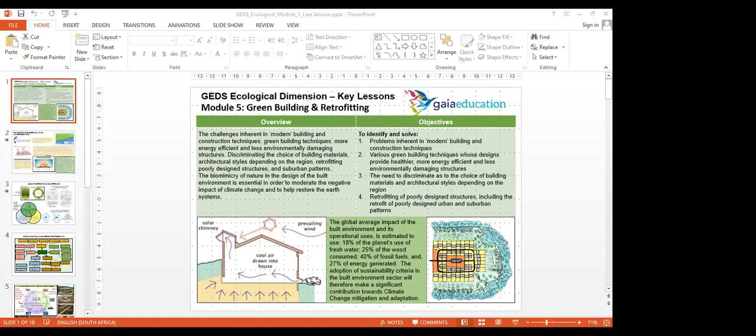Let's get going with the slideshow, and then we can have quite a bit of question and answers towards the end. So in the fifth module, which is green building and retrofitting, it pretty much starts to pull in information from the second module, which is your wastewater treatment and sanitation, urban food systems, renewable energy systems, and it brings it all together in the built environment.

And our built environment is huge. It occupies a big component of the ecological footprint. And we need to apply ourselves with green building technologies, but also retrofitting of the existing built environment stock. So those are some of the key background about this module.

The specific learnings to come out of this would be trying to understand how we can apply whole systems thinking for the built environment, looking at various materials that we can use and how we can retrofit, and then looking at quite a few case studies.

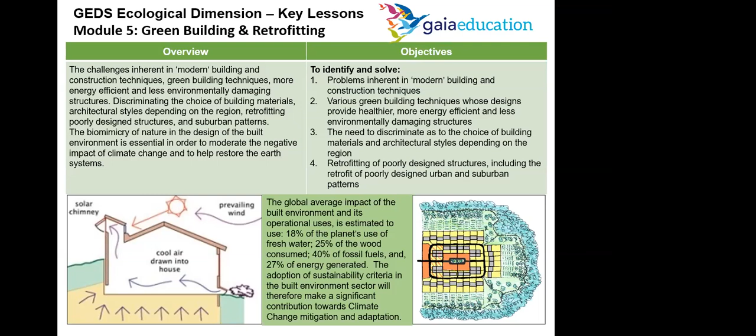But onto the context for green building and retrofitting. According to the Global Footprint Network, the global effort for sustainability will be won or lost in the world's cities, where 70 to 80% of the world's population is expected to live by 2050.

And to corroborate that, here's another independent source from Wikipedia, where they've mapped the urban and rural growth patterns up to existing and then projected forward to 2050. So we're seeing this massive population increase, but also a massive shift of folk from the rural to the urban components, especially in the third world, in Africa, South America, and to some extent Southeast Asia.

In fact, even China, up until probably 40 years ago, was predominantly a rural population, and 40 to 45% of the Chinese population is now urbanized. So there's been a massive shift. Can you imagine 1 billion people and 40% of that moving to new cities, and the impact that has on the ecological footprint?

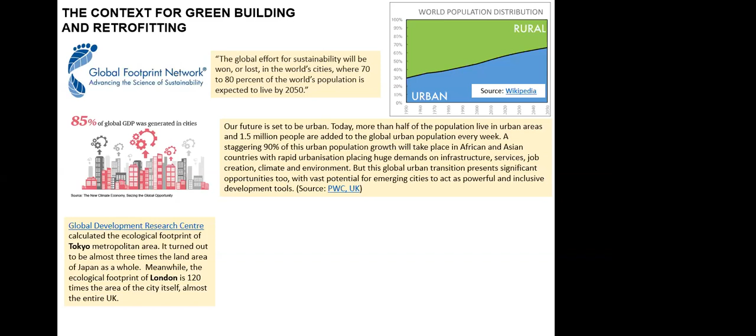Meanwhile, the ecological footprint of London is about 120 times the area of the city itself, and that adds up to almost the entire UK. And what this creates, apart from massive consumption, is this urban heat island effect, where over cities there's a considerable increase in average temperatures, sometimes 4 to 5, 6 degrees, all the more reason to focus on trying to green our cities and especially urban growth.

And then the rationale for this, if we look at just the sheer statistics: the global average impact of the built environment and its operational uses is estimated to use 18% of the planet's use of fresh water, 25% of the wood consumed, 40% of fossil fuels, and 27% of energy generated.

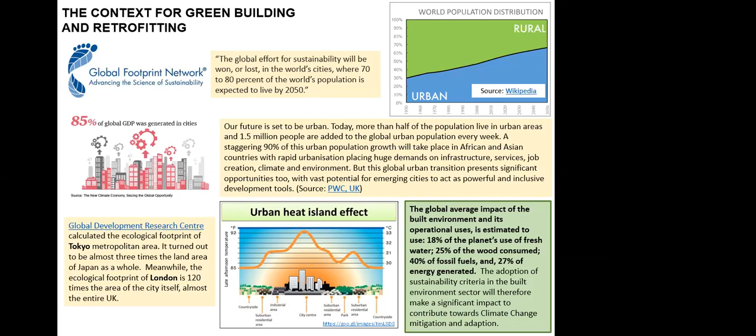So just by adopting sustainability criteria for the built environment, we start to make a significant impact to contribute towards climate change mitigation and adaptation. And Jacqueline posted on the discussion forum some links where they estimate that up to 40% of all material resources on the planet go into housing, and that's the built environment. So that's quite significant, giving us the underlying reason to do something significant to green our cities.

And applying a whole systems thinking approach, from your course book, we need to get our headspace right. So most of the challenges in the built environment, we operate in silos. We have to adopt a collaborative design approach. This happens in our headspaces and our heart spaces too.

So it's a collaborative approach between project managers, engineers, architects, social scientists, and so forth, instead of working in a silo mentality where you don't integrate your various ideas. Related to that, we do need very strong policy and meaningful strategies to mitigate climate change. It's like a three-legged bar stool, each leg supporting the others.

One leg is creating an enabling environment, which takes the form of legislation, policies, and regulation that encourage consumers and developers to go green. By having that legislation in place, we create an enabling environment. The other leg of the bar stool is adaptation.

So now this means local actions that minimize or prevent the negative impacts of climate change. That's adaptation. So that, in combination with the enabling environment, enables us to develop climate resilient development.

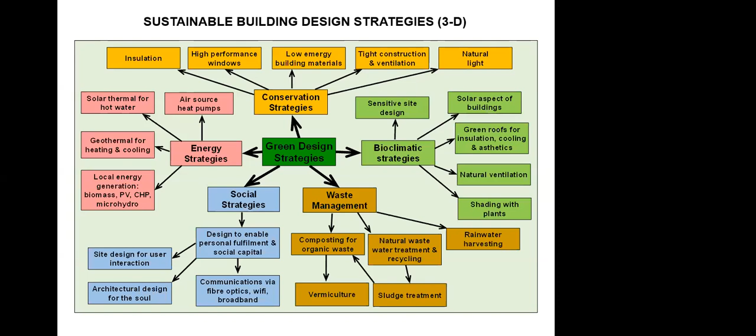Then moving on to, before we go on to two-dimensional strategies, just one slide to depict some really nice natural materials that we can use.

Starting at the bottom, we've got a nice cob house with a wooden roof. It's got its feet that come out of the ground, the so-called foundations. You can see those are made of stone, so when it rains, the splashback doesn't stand much chance of impacting the walls, which would erode, being cob. You've got a very big roof overhang, and also the plinth around the edges is a stone plinth, fairly high up, that can mitigate any erosion off the cob wall.

Then in the center, we've got straw, a very popular natural building material, stone masonry, and then in the bottom right-hand corner, look at all the different colored sand that can come out of a site in close proximity to a building site. These are all the colorants you can use to paint the final rendering of a building, instead of using chemical paints.

And then some nice natural material building out of bamboo, moving upwards. This is called a reciprocal roof structure, wherein there's an outer ring beam that locks in all the rafters, so the rafters don't fall down, and they all lock into place without needing a central column.

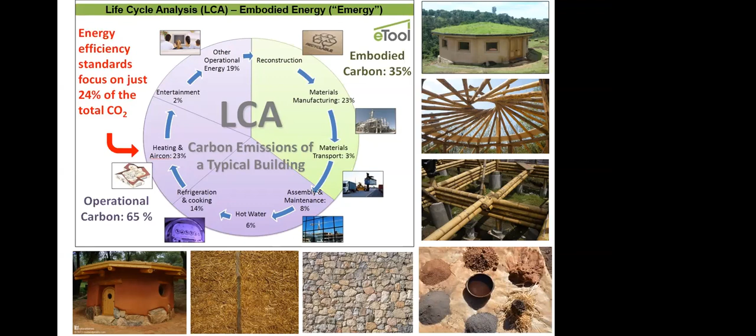Let's look at some two-dimensional strategies now. A Pattern Language is a book by Christopher Alexander et al, and it's a fantastic book that outlines the pattern relationships in the built environment, right through from a city down to a hamlet, and even around at a micro detail around an urban park.

Which way should the park benches face - inwards to the park or outwards? And where do you put a lamppost - next to a park bench or in between park benches? It goes right down to that level of detail. And often town planners are not aware of this pattern language that we need to be mindful of.

As an example, here on the right-hand side of Pattern Language are two housing layouts. This is just theoretical, but the one on the left is a conventional greenfield housing layout. Typical - it could be low-income housing, it could be high-income housing, it doesn't matter. It's urban sprawl, a picket fence with your detached house in the middle of a site, and it's completely disconnected from the natural environment. The words at the bottom say it leads to a sterile, unhealthy, unsafe monoculture built environment, which subdues community spirit and forms a barrier to the natural environment.

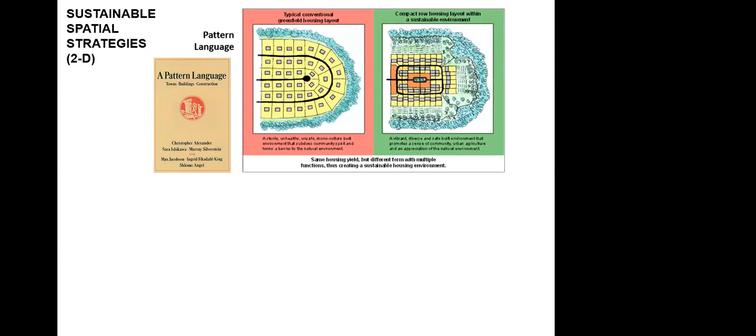It goes into agriculture, it goes into ponds, wetland treatment projects, and very little of it goes back into the river. Most of it gets absorbed through the groundwater. So that's a far more pleasing way to apply two-dimensional green urbanism and integrate it within your sustainable urban drainage. And that will also reduce the urban heat island significantly.

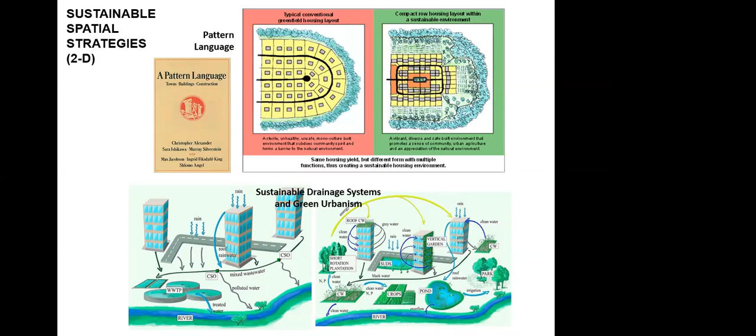And then this is another two-dimensional strategy: integrated infrastructure systems. This is a development called Harlow North, which has been used extensively in the EDE trainings, which started around 2006, at the time this development was proposed. I think at the time everyone got quite excited about how these new ideas could be applied at scale in a huge new urban development project.

Over the years, I've looked for this project on Google Earth and online everywhere, and it seems to have fizzled out. So it's a project that hasn't happened yet, but it's been instrumental in providing a lot of the mind shift towards what we should be doing, even though it hasn't been built.

Just a few days ago, I found this project on the internet, under Web Archives. The developer of this project, which didn't achieve development approval, eventually uploaded all the documents online. It makes a fascinating read for the amount of work they actually did. But sadly, it wasn't approved, and I think there were strange political maneuvers as to why it didn't go ahead.

At the time, apparently there was only one underlying development protocol: the amount of water to be used in this development of about 5,000 new homes meant there was only enough water to draw from the aquifers for half of the daily amount required for water consumption. The daily amount required by a British citizen at the time was about 90 liters per day. So the criteria was we can't deplete the aquifers by more than 45 liters per day per person, meaning we would need to recycle and recharge the aquifers from all sorts of other interventions.

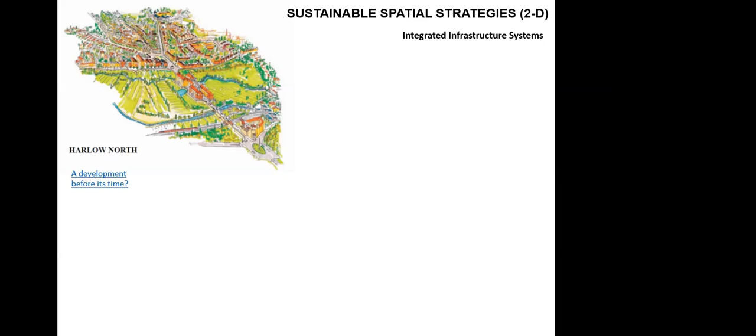And they came up with a plan. It looks like a spider's diagram, but don't despair. The details of this are actually in your additional notes, and you can see section by section how the spider's diagram is basically built up. But it all starts off in the bottom left-hand corner with potable water. The water that is used is recycled and cleaned.

There are also permeable pavings that collect rainwater, clean it and make it fit for consumption. There's treated wastewater that goes back into the river systems. The anaerobic biomass from before, the wetland treatment system, gets composted. Eventually that makes biogas. All the compost that comes out of this goes to farmers who can provide food bought by the workers and people living in this new development, and so on.

So this is one big giant interrelated closed loop system. Even if it hasn't been built, I think it's inspired a lot of other developments to at least achieve some aspects of this in their integrated infrastructure systems. I've put there the link, 'is it a development before its time?' If you click on that link, you'll find the web archive and those wonderful documents that explain the vision of this project from about the 2006-2007 timeframe.

And then putting all this together in sustainable eco-home and eco-village designs. There were a couple of eco-home case studies that we provided, but how do we put these all together in an eco-village type environment? One of the important basics is getting the form and shape of the spatial arrangement correct, because if we get the two-dimensional layout incorrect...

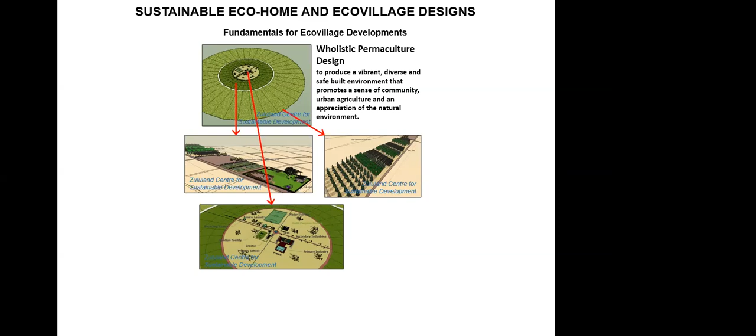If it's not too sustainable, we'll be forever trying to retrofit to make it more sustainable. So think long and hard on the pattern of how everything is arranged. This is where you can apply your holistic permaculture design to get the right layout, or maybe even to retrofit an existing layout.

And around these, we start building naturally for our homes, using renewable energy systems, using ecological water and sanitation, our local food production, and then creating the platform for our socioeconomic fabric, where we provide local employment opportunities, community facilities, and so on.

And also a local currency that can help the exchange of local goods and services in this type of development, and avoid money being lost outside the system. So that's how we can integrate all these ideas in an eco-village setting.

So having said that, just to think forward now, there's a lot of ideas that probably came out of all five modules. And now's the time to start conceptualizing some of the potential case studies that you can undertake in teams of 3 to 4 students for the design studio.

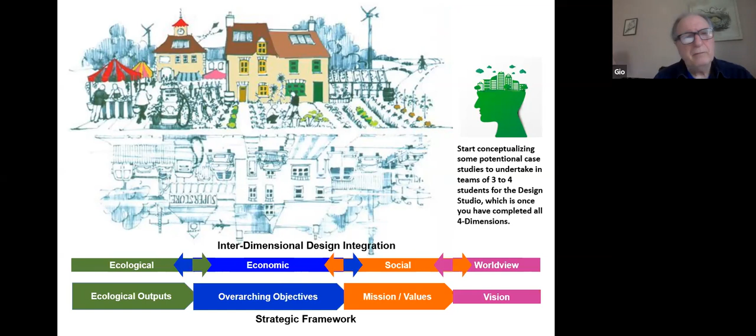Gio, just a correction, I think the closing date for this dimension is about the 8th or 9th of March, not tomorrow. Oh, well, in my calendar, isn't this the last module, Ezio? Yeah, it is, but there's always about a week over for students to finalize their submissions for module 5. Okay, what I meant to say is that we had projected the 5 modules would go until tomorrow, and then of course there would be an extension or two. So you're right, it's not going to close then, people can still work, but we want to draw it to an end in the next couple of weeks or so. Yeah, correct.

Are there any questions about this particular slideshow that people want to ask, or just to comment on?

Hi, can you hear me? Yes. Hi, I'd like to ask, I'm Cosima, sorry. This Harlow North development that was never realized that you mentioned, is there any way of finding it anywhere to have a look at it?

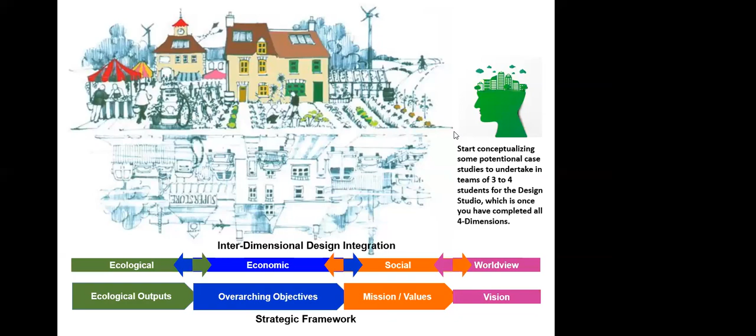Yes, we're going to upload this particular slide. Let me just go to the previous slide here. You'll be able to... where is it? Here, no, one more slide up. There it is, this blue hatching here is the web archive with more information on it. But I'll also post it in the discussion forum for everyone to look at, which will make it a bit easier. Brilliant, that'd be helpful, thank you. Yeah, and if there's any way you could push this development along or draw insights from it, feel free to use that material in any way you can. It's quite well constructed, I'm sure it'll come in handy at some point. Thank you, okay.

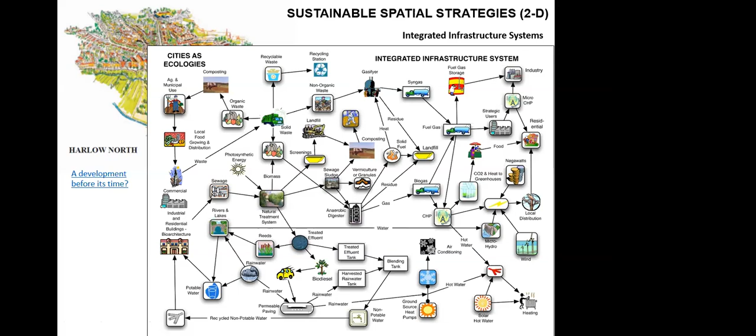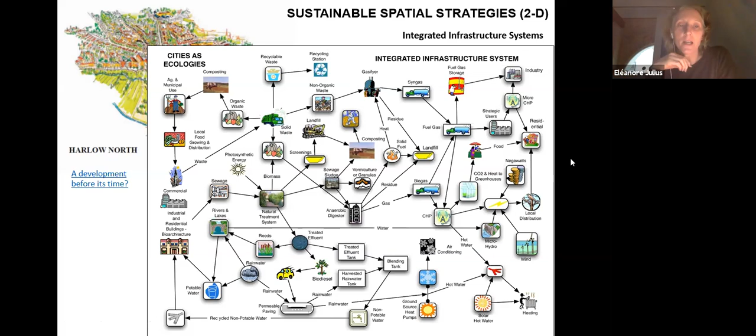Any other comments or questions? I had a question, here's Eléanore. I had a question on the decentralized one, it was one of the first slides. So there was centralized, then decentralized, and then this distributed network within an urban environment. What does that include? Looking at that one on the bottom right, if I take Paris, for example, what are we talking about? What is centralized, decentralized, or distributed? So what are some examples?

I think the example of centralized would be one power station delivering energy to a few substations and then a distribution network. This is in an energy context.

A decentralized energy system would perhaps not be through several power stations, but maybe some renewable energy systems like a wind farm or a biomass boiler - for Paris it would be a bit different - but you might have outlying energy farms: solar, wind if applicable, biomass. There would be more of these points rather than one central coal-fired power plant. So in having more power generating facilities, they would be linking up to a more decentralized system. But in turn, each decentralized node would also be interconnected, so if one goes down, it can draw support from another. This creates a more resilient web.

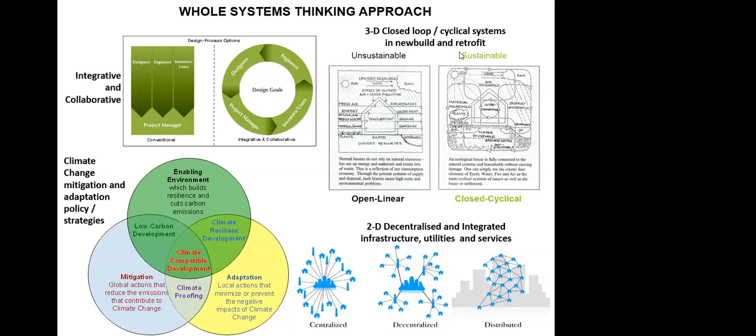I would like to ask something. I'm Gökmen from Ankara, Turkey. Ankara is the second largest city of Turkey, about 5 million, more than 5 million people in the city, so it's a crowded city. Our initiative, Güneşköy, is about 60 kilometers from the city. We are in the rural area trying to make a connection or reconnection between rural and urban.

But there is really a large effort to put high-rise buildings and very inefficient buildings in the city center. The surfaces are covered with glass, with no insulation, I think, or very, very poor insulation. So it's going in a different direction. Now I really wonder how we can change this trend, including the vicinity of the city. For instance, we can produce our own food around the city and feed the city with healthy food. There are lots of grassroots movements in Turkey, but it will take some time.

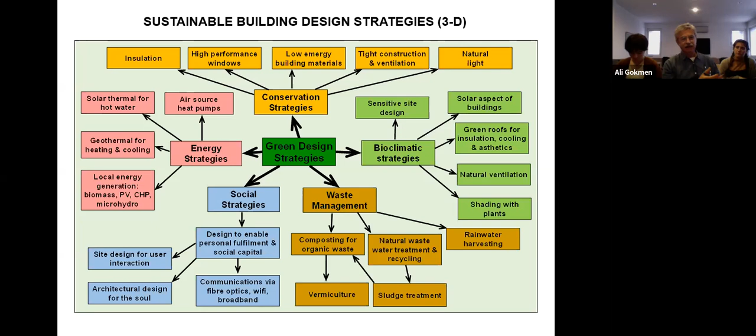My question is about Gaia Education. When we finish all 4 modules, you mentioned a design studio at the end. I wonder what we can do. There are many students with us here - an architect, and we have students from city planning and engineering, social sciences, and other fields. We want to start a movement in Turkey, in Ankara, maybe visit our town. So can you comment on how we can proceed in the future and how this design studio can help us reach this purpose? Thank you.

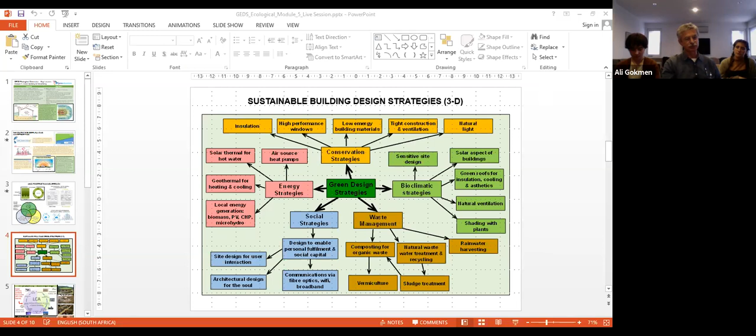Thanks, Ali. What I'm going to try and find is a slideshow, because this is quite an important question. You've got students there who are probably so interested in how they can take this further. Let me see if I can find it, and then I'll share it with you - it's from the case studies that we've received over the years. I'm going to share this on the screen now. Let me share.

So Ezio, while you do that, maybe I can give Ali a couple of pointers about the design studio. When you get to the design studio, there will be perhaps 25 or 30 students. Before the design studio, we will ask you to submit a project that you would like to work on. We will select 5, 6, or 7 projects and create small groups of people - we like to have between 3 and 5 in a group so there's good working dynamics. More than that may be cumbersome, and fewer may be too much work for the few. So in the design studio, you will be set up in a group with 3 to 5 people who have finished all 4 dimensions of the course, and you will work on a design project submitted from inside the group. That's how we run the design studio. You can then take all that knowledge and information you learned in the design studio and apply it with your group locally.

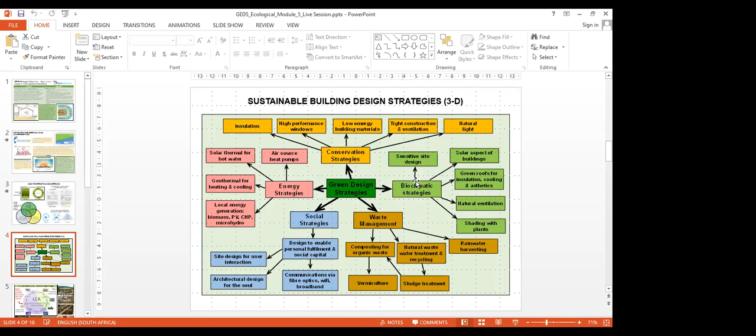Any other pressing questions about the slideshow for Module 5? I think if there's no more questions, maybe we can wrap up the session. I see there's one in the chat. Anyone with a hand up?

Oh, Kubra, you've already started translating it. So maybe you, myself, and Ali can put something together to start this initiative. Okay, we've got a team effort going here. Certainly have. All right.

No, good stuff. And as Gio was saying, if you're a bit late with your assignments, just write to us. I know I've got a backlog in providing feedback on modules 4 and 5 so far, but just write to us if you're going to be a bit late, and we're very understanding, because we really want everyone who's made an effort to finish off. In fact, I'll be pestering some of you who say you've only got 1 or 2 assignments left. We're keeping the door open, so just bear with us, and similarly, just let us know if you need more time.

Can I ask a question? My name's Claire, I'm one of the founder members of Güneşköy. I have previously taken MOOCs from different systems, and with this I was actually expecting it to be more interactive. I wonder if this is something that has been specifically chosen to have it this way rather than something more interactive.